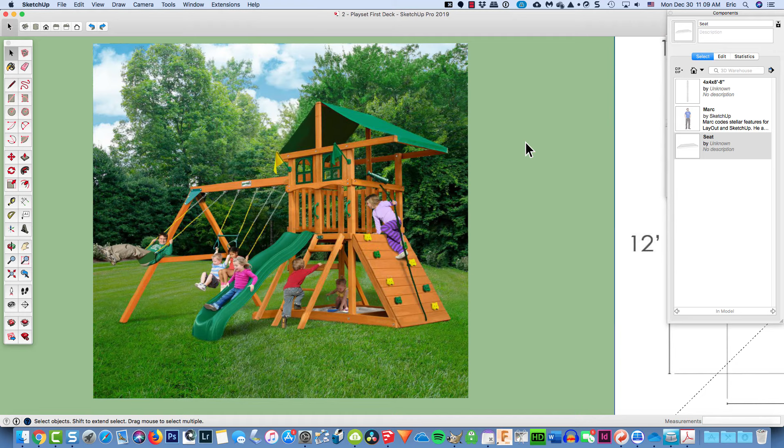Okay, next we're going to come in and build this first deck right along here. You'll note that it's basically just a platform. These boards right here are probably 2x4s.

T for tape measure tool. Let's do that one more time and move that up so it's a little easier to see. So now I'll just measure there, and yeah, it's about 3.5 inches. So those are 2x4s, and again, we're just going to make them 2 inches by 4 inches.

So I'll go Shift Z for zoom extents, and I'll come into my 3D view. I'm going to go ahead and erase this guideline that we made for making the seats. We don't need that anymore.

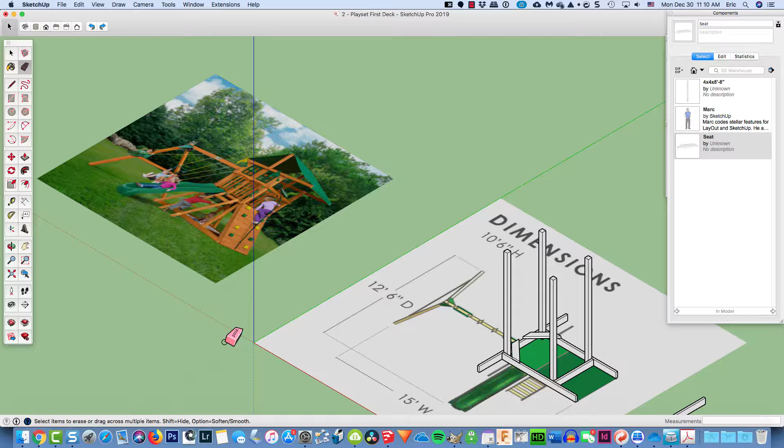I'm just going to take this right here. I'm going to select it, right click, make it a component, and call that piece a 2x6. And it puts it over here so I can bring another one back at any time if I want, but the reason I did that was just so I can delete it for now. Because next I'm going to make 2x4s.

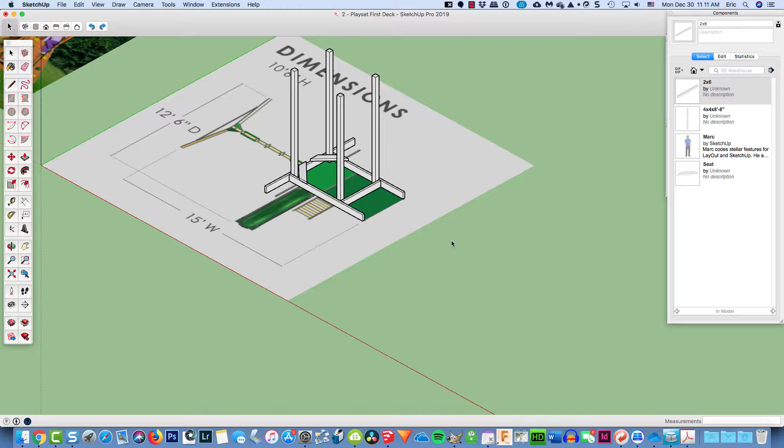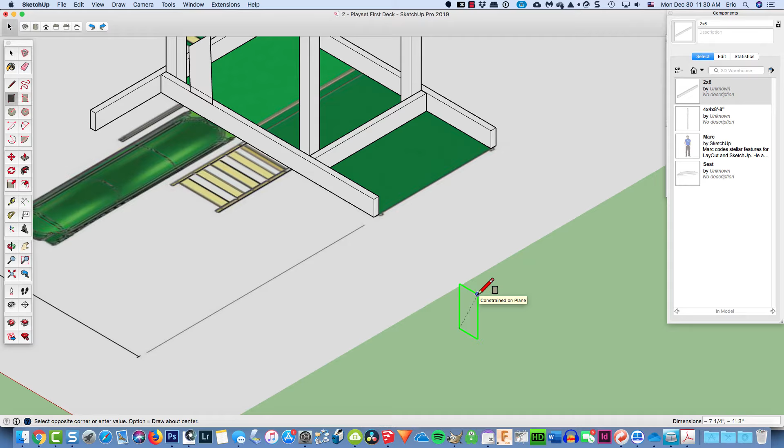I'm going to make them the same way. So to make my first 2x4, I'm just going to make it the same way I made my 2x6. I'm going to start with a rectangle, place it out here on the ground, use my arrow keys to line it in the direction I want, then type in 2,4 since we're working in inches, and then P for the push-pull tool.

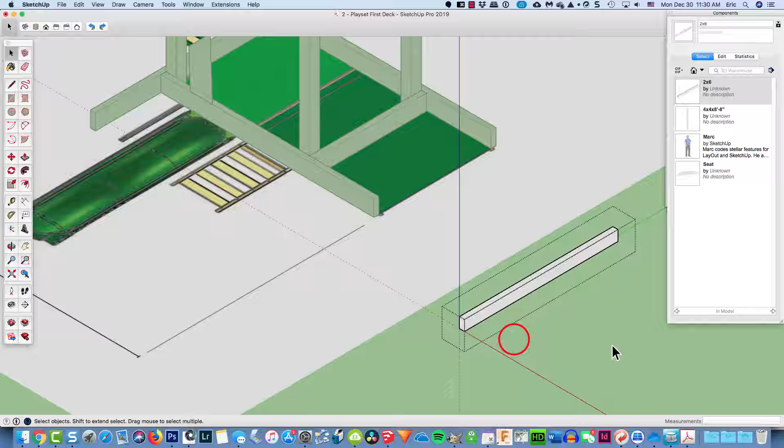Now I'm going to triple click on this and make it a group so that whenever I click on it, it selects the whole thing. However, if I want to change the length of it, I'll need to open up the group by right-clicking and editing the group, or double-clicking on it. Both do the same thing. Then I can make it longer or wider, and eventually I'll probably make this into a component as well, but for now I'm just going to leave it as a group.

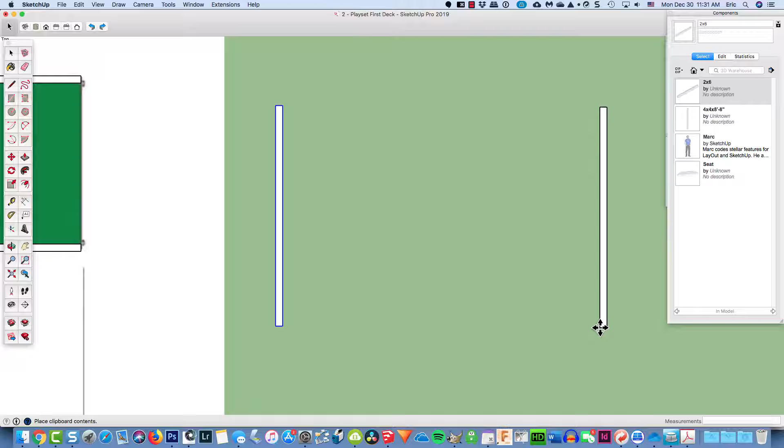So I'm going to come into my top view here and shift over a little bit, click on this, Control C for copy, paste. I'm going to put another one right there, then type Q for rotate, click on any corner, come out, pull down 90 degrees. So now everything is oriented with the posts on my playhouse.

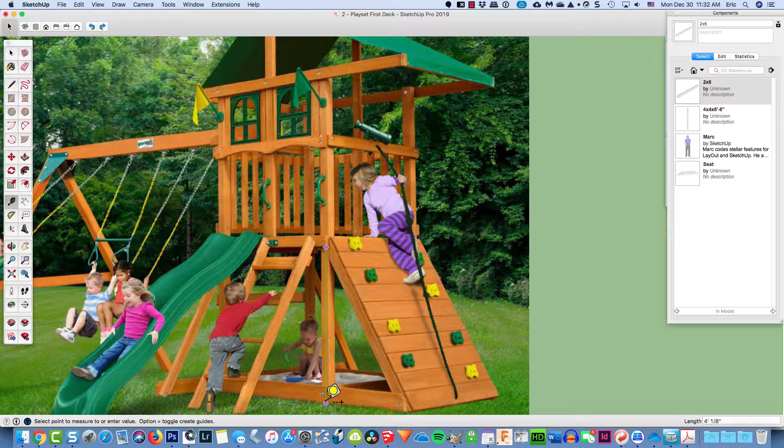So let's come back into this view and take a look at our picture. Let's find out using our tape measure tool how far it is from the bottom of that 2x4 down to the ground. It looks like it's about 4 feet, and 4 feet's certainly close enough. So I'll do a zoom extents, and then come into this view here.

What I want to do is make a line that goes up 4 feet. So where's a good point to do that? Well, I'll do it on this outer face here. What's really going to help me out is if I can go to X-ray mode, and you'll see why.

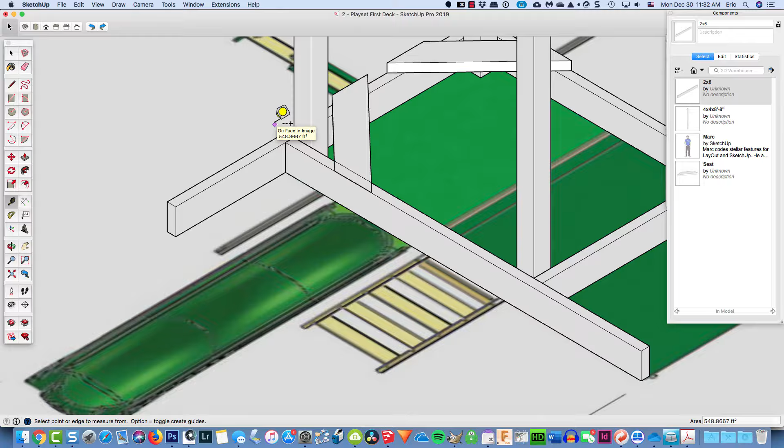So there's X-ray mode right there. I can pick that point right there and drag up along the blue axis, type in 48. Oh, I accidentally right clicked there. There we go, type in 48, hit enter, and I've now got a guideline that goes across my post. I'm really only going to need one of those, although you could certainly go all the way around.

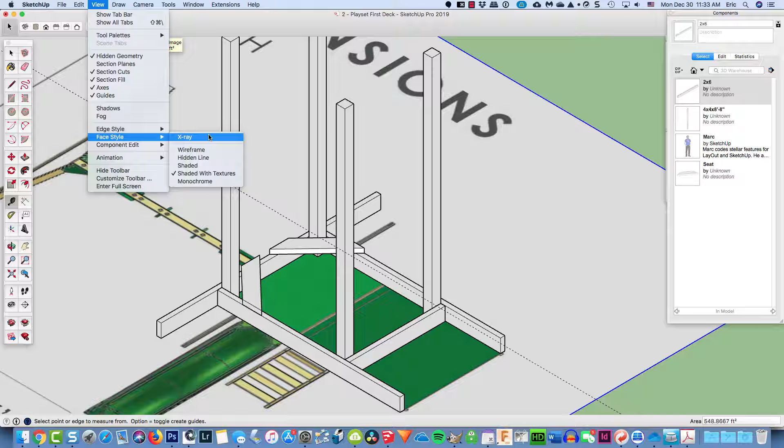Now, how did I do that X-ray mode? Well, I just pressed my X key because I use it so many times. But you can come up under camera—I think it's under camera. Nope, it's under view, edge style. Nope, face style, there we go. X-ray. So it's been a while since I've looked for it. You can click on that and it'll turn on X-ray for you.

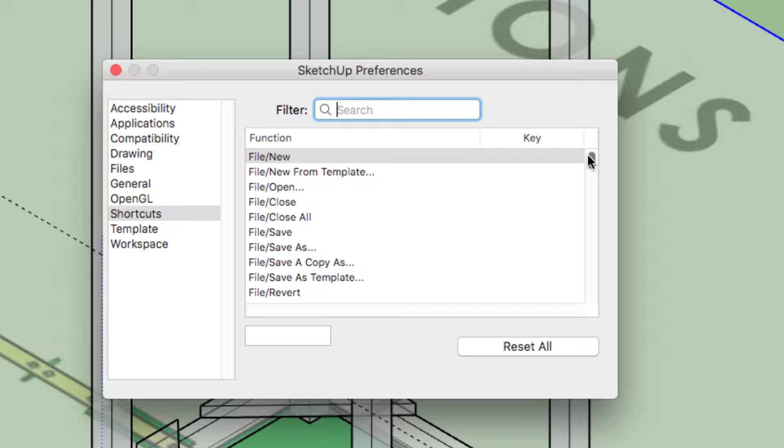But that's a little bit of a pain. So what I do is I come up into my preferences and go into shortcuts and look for—there's a billion different shortcuts you can pick here. Okay, so I want to filter those out. I'm going to type in X dash, and there it is right there. So what I did was I highlighted it and then typed an X in right down here. That's why it shows up here. You won't have anything there, but just put an X right there.

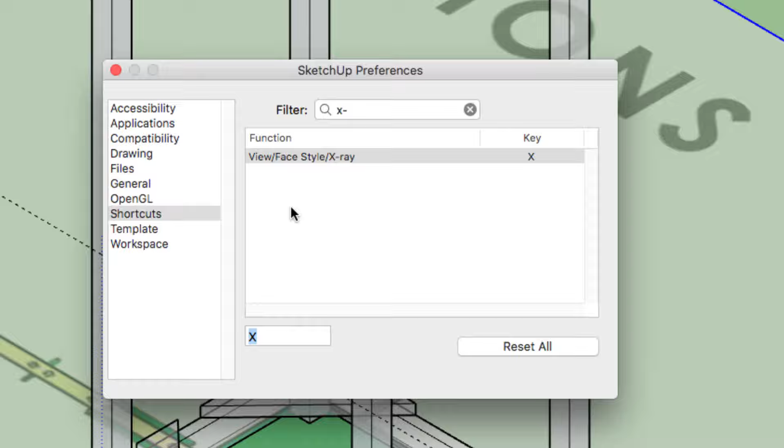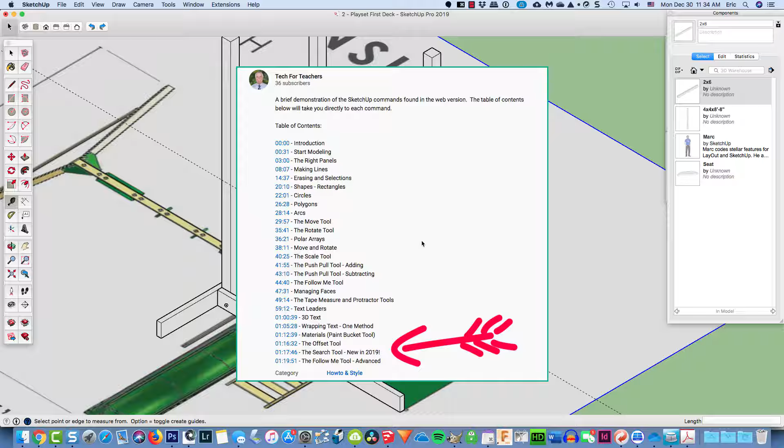After you've done that, you can close these preferences and turn X-ray mode on and off by just pressing your X key. Super, super handy. Now, if you're using the web version, go back and take a look at my screencast, and you'll see a link that'll show you how to do that. But basically, you use the search tool, which is pretty cool. You don't have these menus across the top in the web-based version.

Okay, so let's go ahead and get started with the deck. I'll use my select tool here. I'm going to grab this 2x6 and copy it. I'm going to paste it, and when I do that, it goes ahead and attaches it.

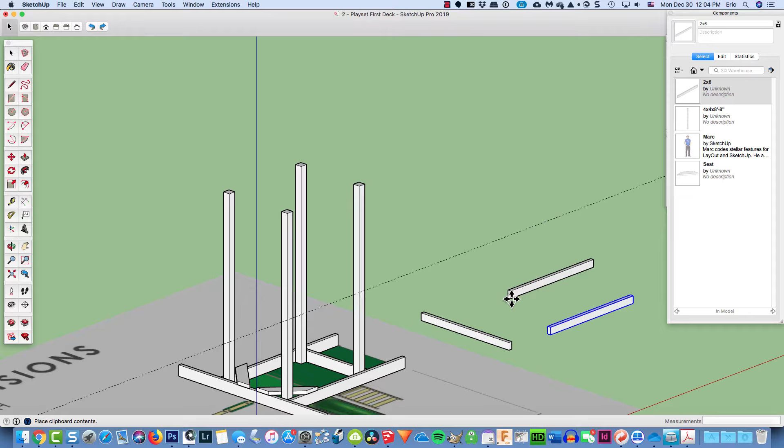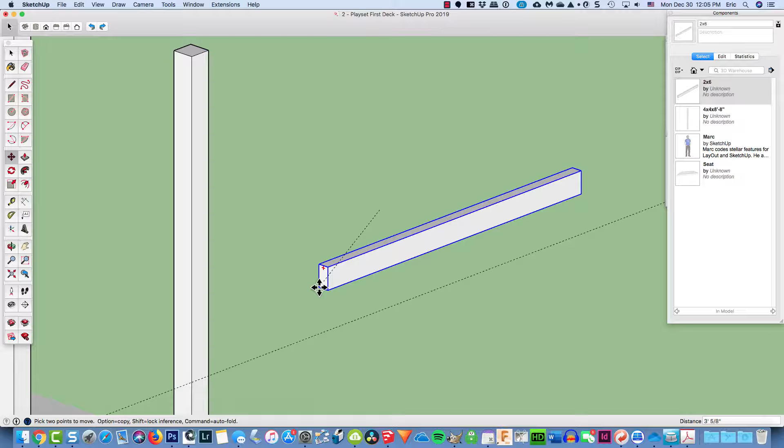We'll zoom in here to see how it attaches to the origin, or the point where I started to create the 2x6. Let's go ahead - we don't want to place it inside. So what I'm going to do is type M for move and grab that point instead, even though SketchUp was trying to do me a favor here. I'm going to put it right there, and then orbit around this side because it's just a little bit too long.

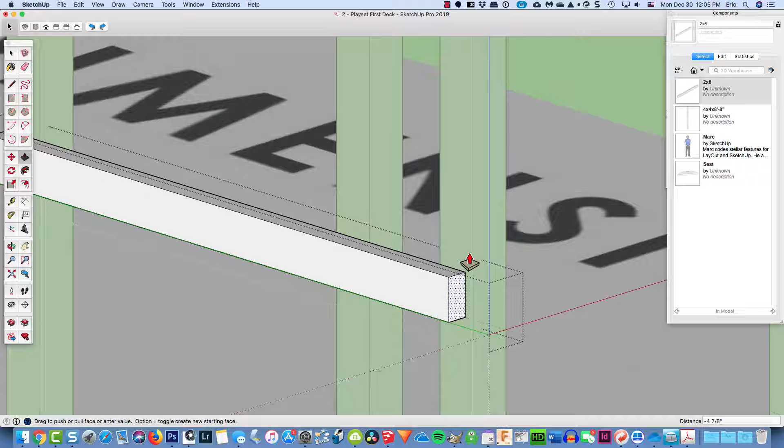I'm going to double click on it to open up the group. P for push pull, and I'm going to pull it in. I could guess how much, but what I really want to do is just line up the face of the 4x4 and the end of the 2x4. Then I can just click, and that is done.

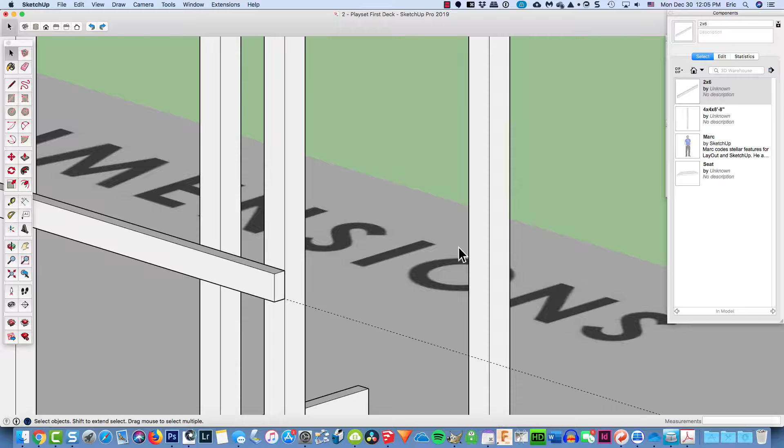Now, to make that work even easier, I'm going to go ahead and move it across along, I think, the red axis. So I'm going to click this right here, type M for move. I'm going to pick this base point right here - oh, nope, I don't want to pick that one, I want to pick this one. And I'm going to start to move it along the green axis.

Before I left click to place it, I'm going to tap the Option key or the Alt key, and then I'm just going to move it across to here, parallel to the green axis, and on this edge. I now have a copy that is all lined up just like it should be.

Okay, this next part, I'm not exactly sure how the Gorilla folks put it together, but we need to make a floor and we need to have some supports for it.

So what I'm going to do is select this 2x4 and I am going to move it. I'll type M for move, and I'm just going to go ahead and click anywhere, and I'm going to pull it across, tap my Option or Control key. I want to make sure I'm along the green axis so everything is looking good. And that's a distance of 6 inches, because if you include the 2 inches for the 2x4 and the 4 inches for the 4x4. So I'll just type in 6 and hit enter.

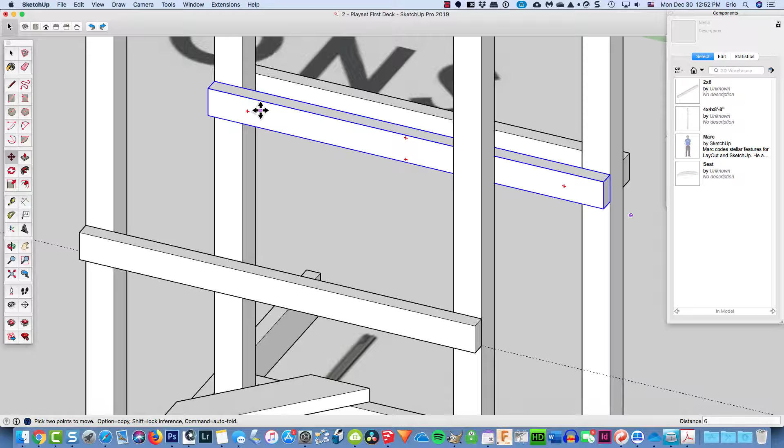And then I need to move this down 1.5 inches. So I'll just click anywhere while on the move command, pull it down along the blue axis 1.5, hit enter.

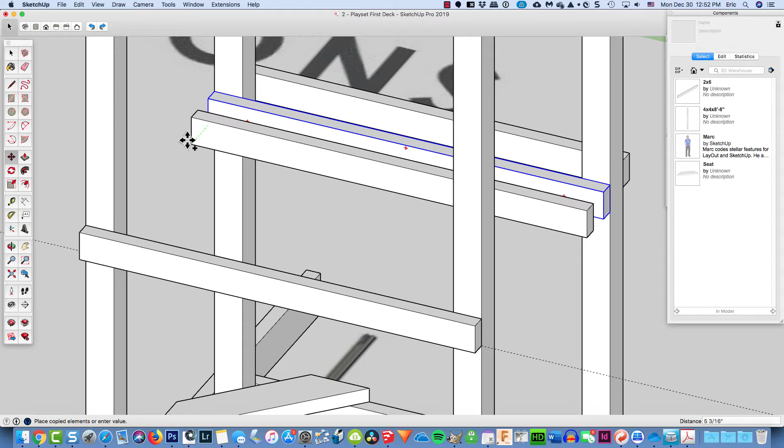And then I'm going to make a copy move. So I'm going to grab this base point right here, move along the green axis, tap the Option or Alt key, come across here, and this is a good time to open up X-ray so that I can attach it parallel to the green axis to that back edge. There it is right there.

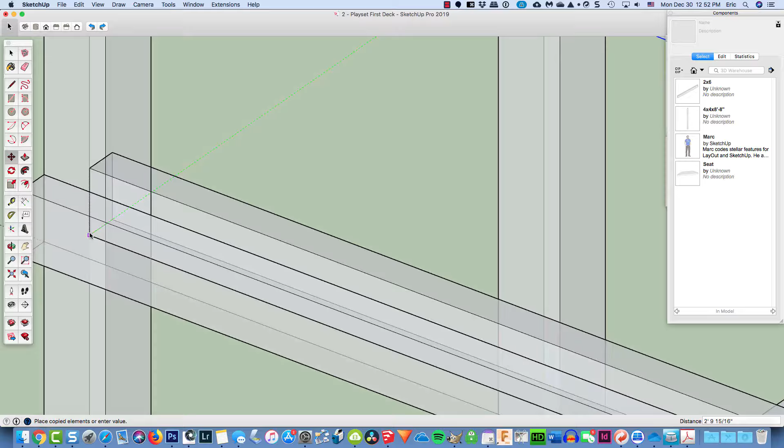So it's on the edge of my 4x4, so I'll click on that. Let's see if I did that right. Turn off X-ray, and it looks pretty good. Let's go to some of our orthographic views here so that you can see what we've got. It's across here that I'm going to build the deck, so let's go ahead and do that next.

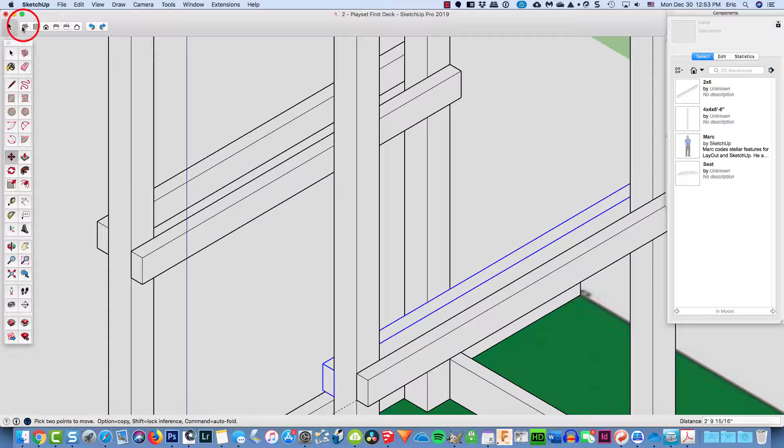I'm going to do something a little bit different here. I'm going to right click and I'm just going to hide the image and turn off my hidden geometry so that I've just got my building materials now. If I want to get it back, I can come up under View, select Hidden Geometry, and now it shows up as a grid. Right click and unhide it, brings it back.

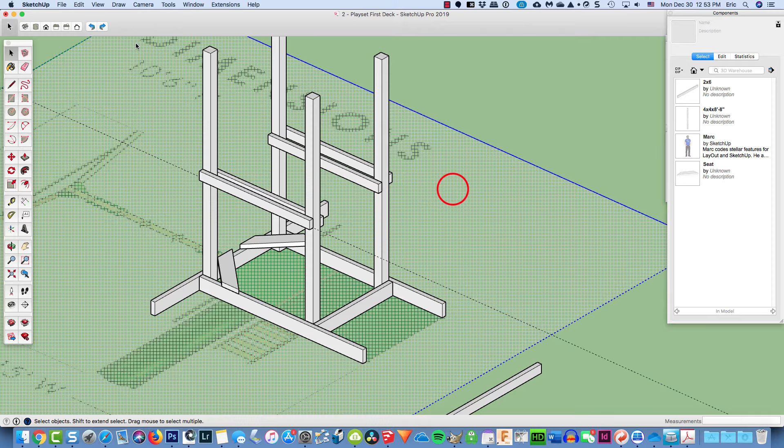Okay, so let's go ahead and grab one of these 2x4s that are going in this direction, and I'm going to do a move and I'm just going to pull it up, just make a copy. Again, you can copy and paste. Q for rotate, and I'll come to the end here, rotate it 90 degrees so it's laying flat.

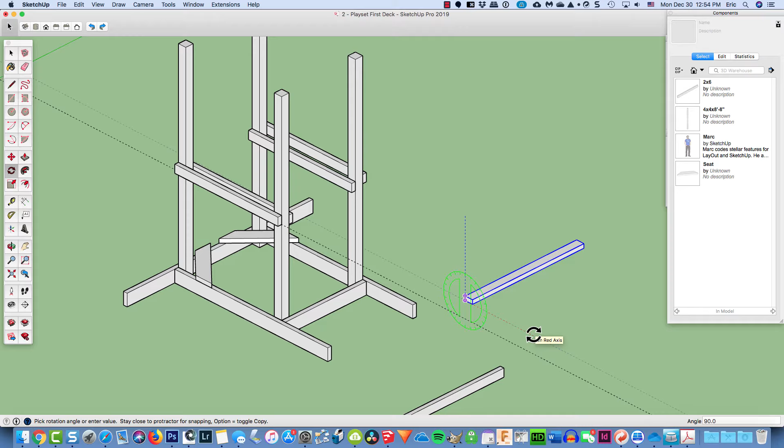Type M for move, grab that top part right there, Option or Alt to make a copy, and then I'm going to put it right there.

Now, I moved it down 1.5 inches, didn't I? Because I was thinking that 2x4s are really 1.5 inches, and that's true, they are. But we've been doing everything in 2 and 4 and 6-inch units. So that's why they overlap in that area.

So let's just quickly fix that. Click on this one, and hold down my Shift key and click on this one. M for move, click anywhere, move down along the blue axis, 0.5 or half an inch. And there we go, that's fixed.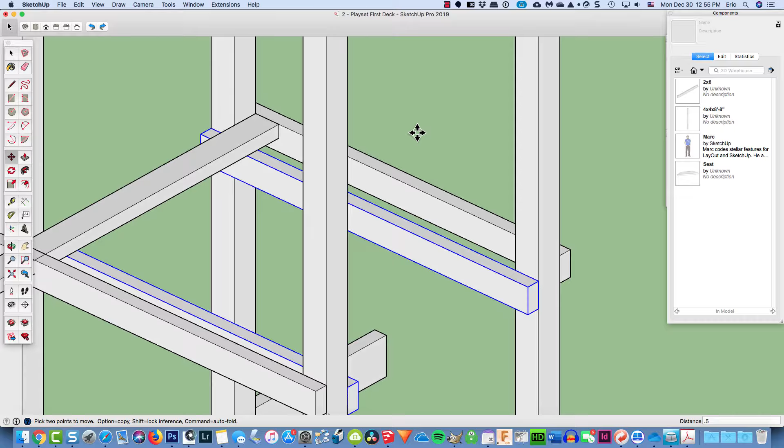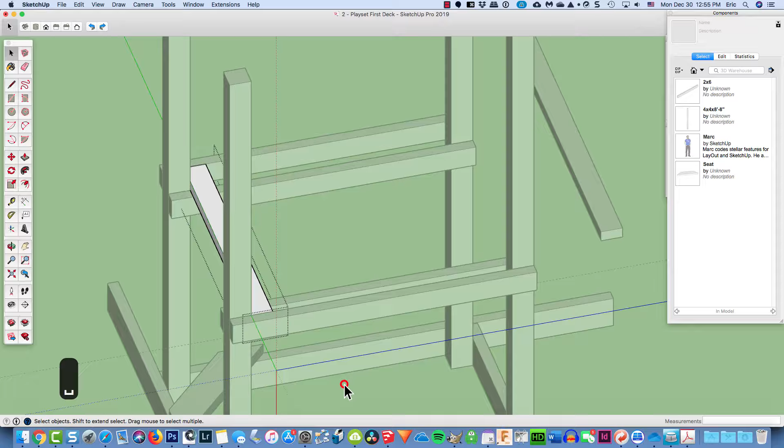So let's see here now. This part is pretty amazing, but before I do it, I need to shorten this up. I'll double click on that group, P for push pull, and pull it in so that it's even with that edge. Then click outside, and it now fills that space.

So what I'm going to do next is fill all of this in with just a couple of keystrokes. You're going to need to listen carefully because everybody wants to click down here in the measurement toolbox. You never ever click in here. You just go ahead and type and it starts putting numbers. That's something people need to adjust to with SketchUp.

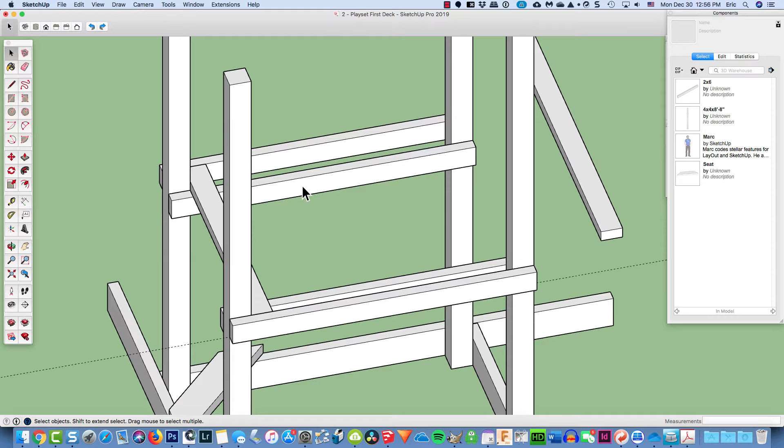So let's go ahead and make those copies. I select this, M for move, grab this top point, and as I start to move it along the red axis, again tap the Option key and plunk it right there.

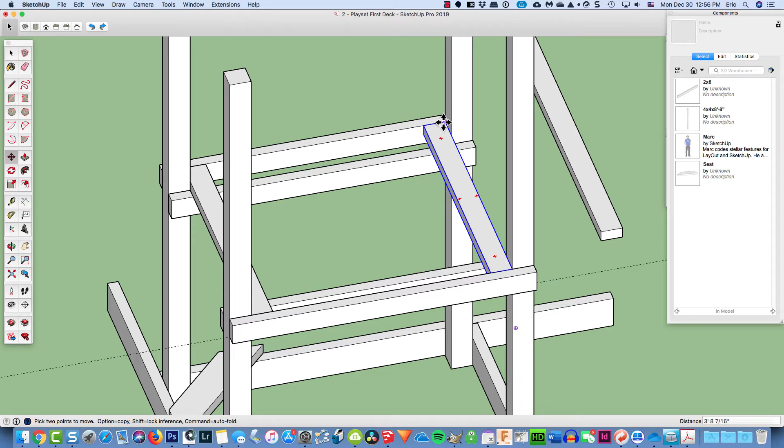Now here's where the magic happens. I did left click to place that right copy, but now I'm going to fill it with boards. I'm going to just guess that maybe 8 boards will fit there, so I'll type in 8, then the slash or divided by key, and hit enter, and it evenly spaces 8 copies.

Now 8 would work, but 9 might be better. Again, I haven't touched the mouse - my hand is off the mouse, I can't stress that enough. Go 9 divided by, that looks better. Let's try 10 divided by, that's better. Let's try 11 divided by, and it looks a little too tight, so I'm just going to stay with 10 divided by, and go with that.

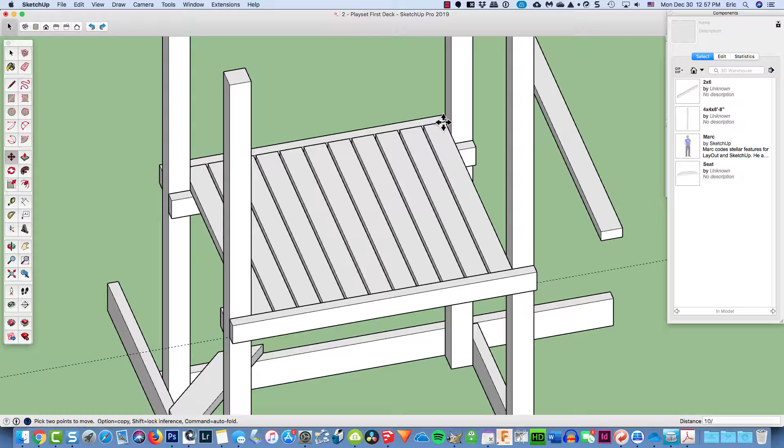So now I need to fill these ends right here. I'm going to go ahead and grab this, M for move, grab this top corner. Actually, I'm going to turn on X-ray and just grab that top corner there, and then turn X-ray back off. I'm going to start to move it out because I want to put it about right there.

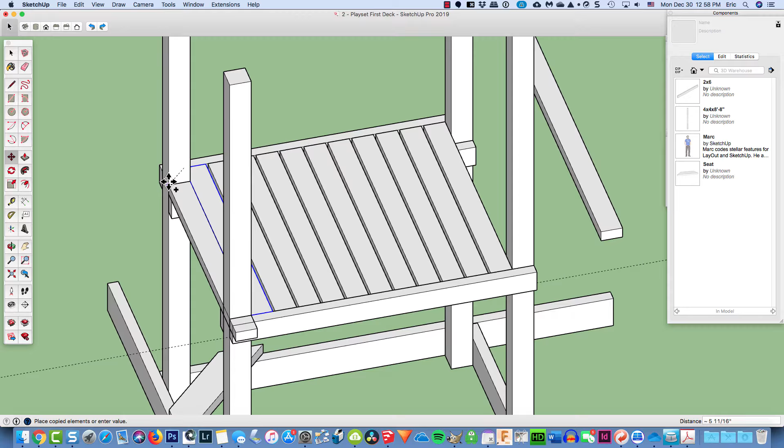But if I don't tap the Option key, I won't get a copy. Does that look about right? Yeah, that looks right, so I'll place it there.

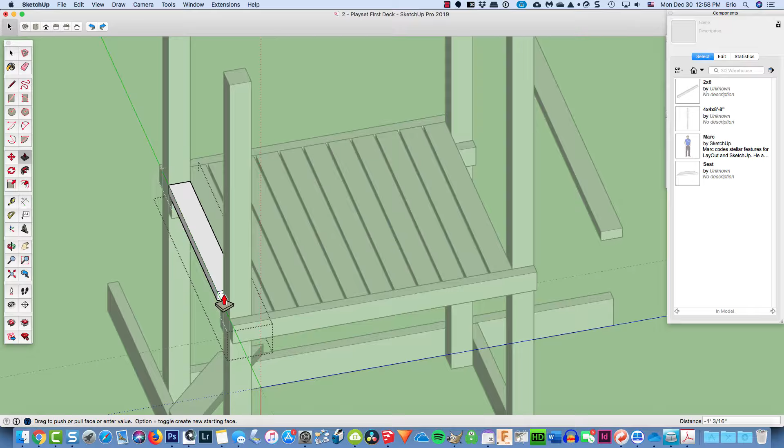Then space bar, open up that group, P for push pull, and pull it back so that it's about there. Then let's rotate this around. And then I'll pull this so that it's even - let's see, I need to grab it right on the edge here.

There we go - wrong surface. There we go, just pull it out so that it's even to about there. There we go, and I like that.

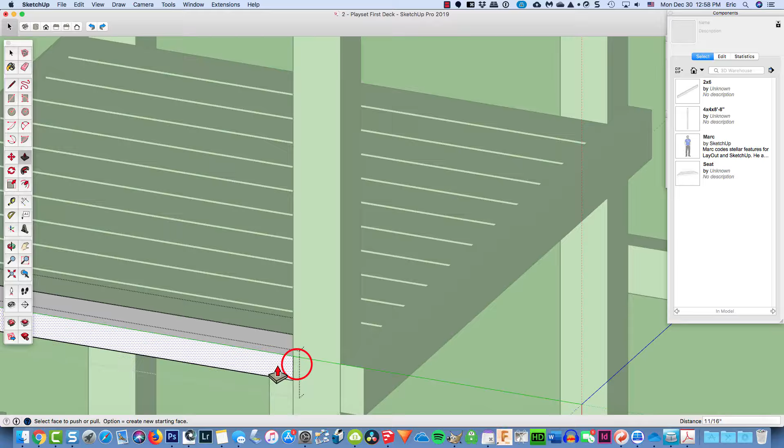So I'll click outside the group and then take this - probably know where I'm going. M for move, grab it right there on that end point, start to pull it across, make a copy, plunk it right there. Let's look at our top view, see what that looks like. It looks pretty good.

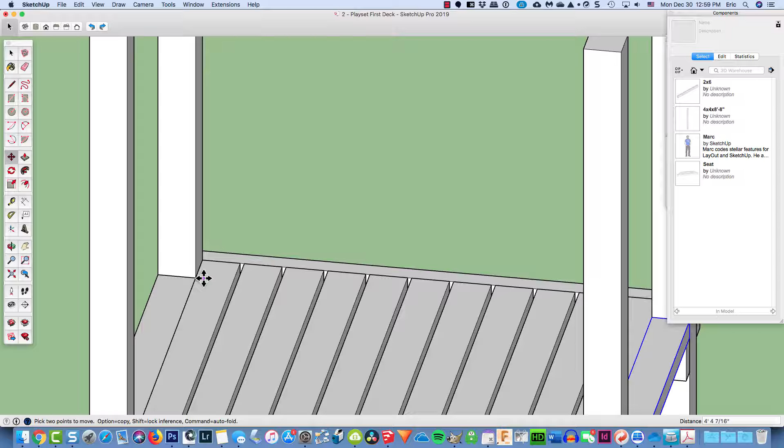I'm not real happy with the spacing right there, but I'm just going to go ahead and call that good because that fills everything in. I think if I was to redo it, I would take and scoot that over just a touch. As a matter of fact, I'm just going to redo it because it bothers me.

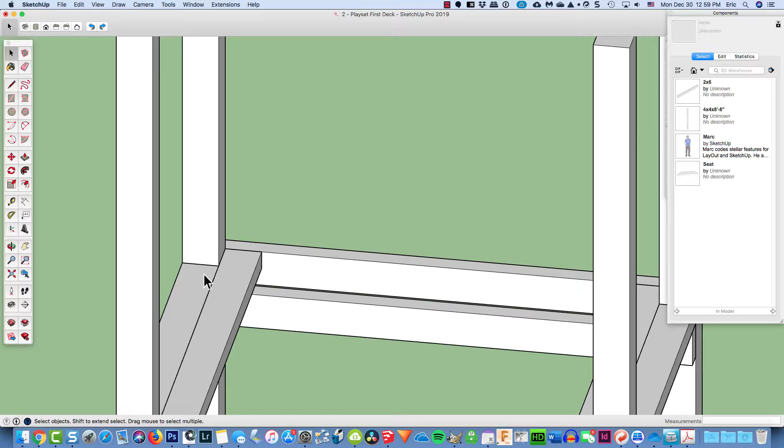So I'm going to hold down my shift key, because this isn't going to take very long to do it all. I am going to just delete those boards, and then use the move tool and grab it and just move it along the red axis, and I'm going to type in 1/4 for a quarter of an inch, and that gives me a little bit of a gap.

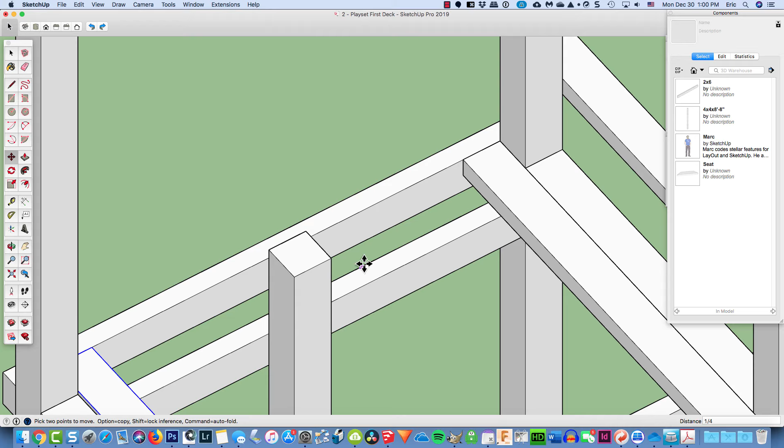And so now I'll rotate this around. Oh, I forgot to delete that board right there. Let's use our tape measure tool to make a guideline here, and I'll type in 1/4 inch. So I've now got a place to move it to.

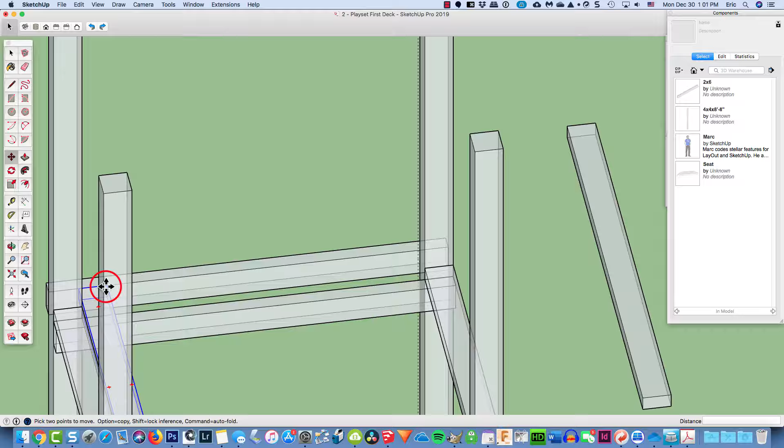Click on this, M for move, turn on X-ray, grab that corner right there, move it along here, Option key until I get to that intersection, turn X-ray off.

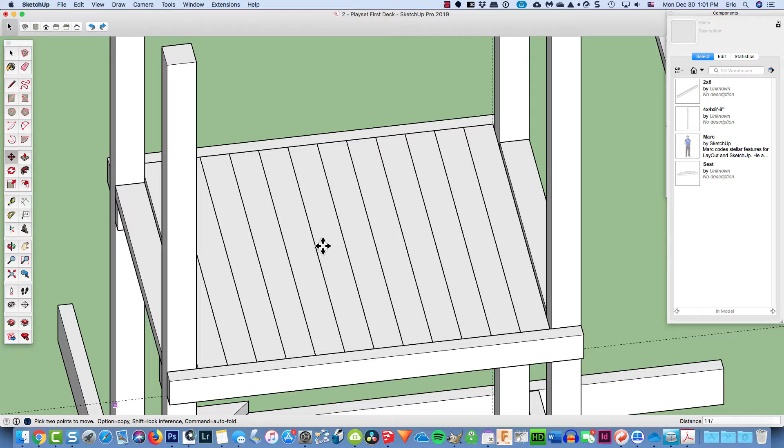Let's try 10 divided by, see how that looks. Let's try 11 divided by - a little too tight, so we'll stick again with 10 divided by. That quarter inch didn't really seem to matter a whole bunch, but I like that spacing a whole lot better. So at this point I'm going to save, and we will work on the railing next.

When we look at the railing here, what we've got is boards that go across the top, and that one's going across the back, and I'm just going to make all those 2x6s. We've got these rounded notches here, which we'll address separately, and then we've got some 2x6s that go across the back sides, and then these vertical slats.

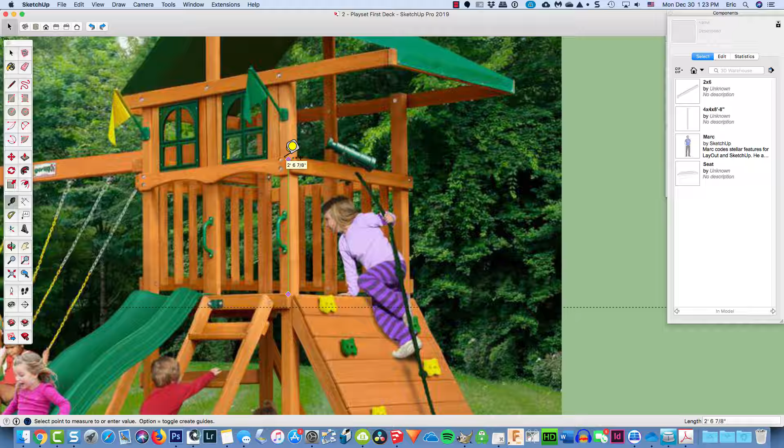Let's do a quick measurement, T for tape measure. I'll go from the first deck platform up to about there, that's about 2.5 feet, we'll call it 30 inches. I'm going to use my tape measure tool to put it on this line, bring a guide up along the face of that post, then type in 30 inches, and it'll snap it in place for me.

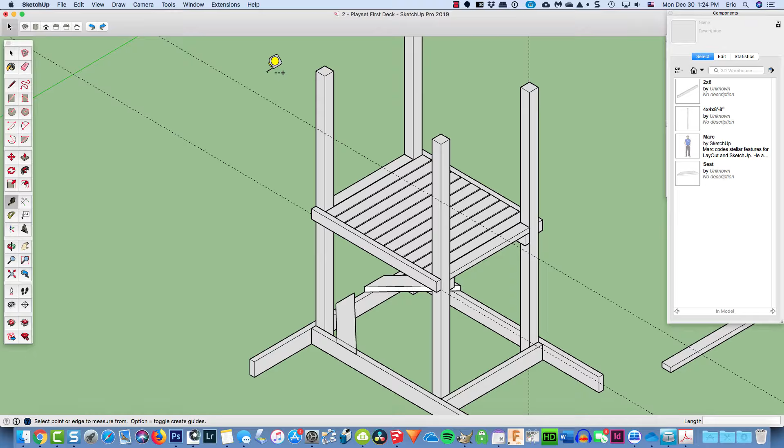At this point I've already created a 2x6, so I'm just going to grab it out of my components and put it right there. Then we'll do the same thing, M for move, grab this point, pull it along the red axis, tap my Option key, and put it in at that intersection.

I've got to put one across the face, so I'm just going to move one out here, do a copy paste essentially, Q for rotate. If you're having trouble getting your protractor to snap, remember you can use the arrow keys to move it around in the different orthographic positions.

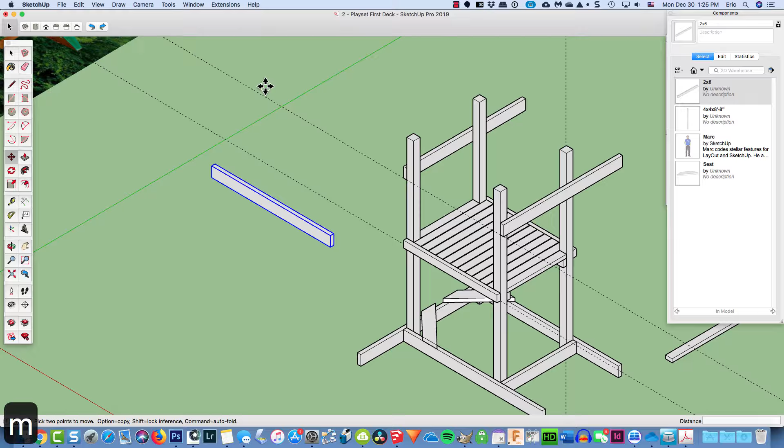This time I just want it to be there, so I'll come out along one of my axes, snap to the second one, and now I can do a move. So I'll grab this one here and put it right there, then M for move, click there, pull across to here.

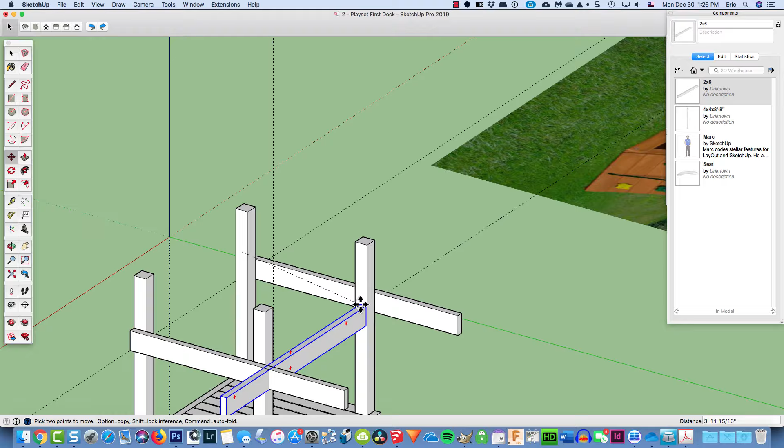Let's orbit around here so we can see our point. Got to tap my Option key - I make it sound routine, but lots of times I forget to do it, so I have to go back and start my move again. So now we've got the top of the railing constructed.

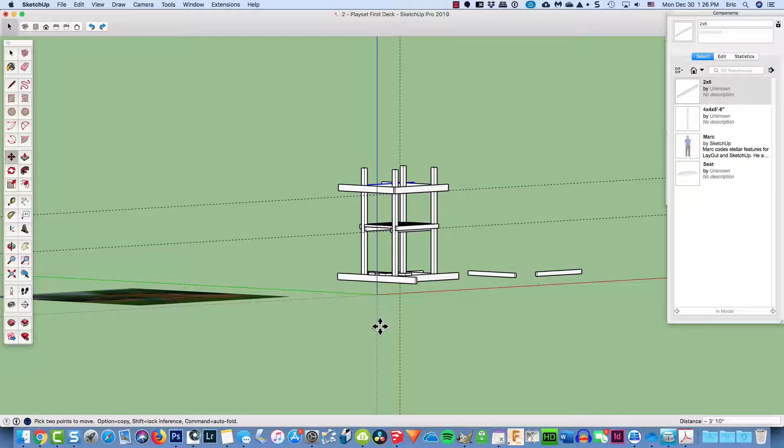Let's come around to the back side here. I'm going to take this one and move it down - we don't really have a measurement for that, so I'm just going to click out here, pull it down along the blue axis, and put it about there.

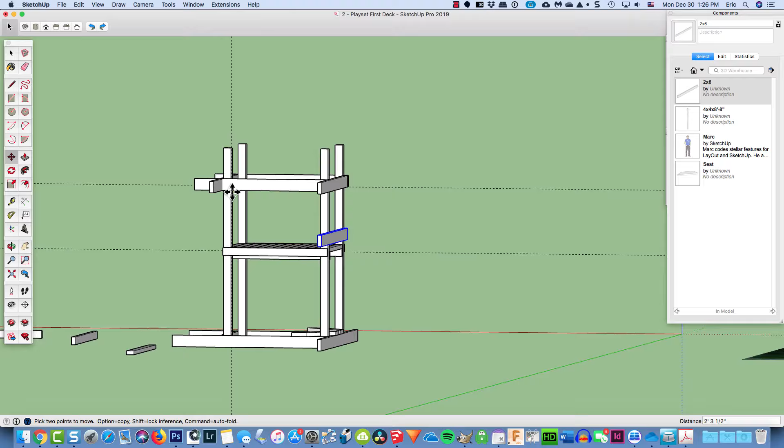Let's go ahead and select this one, move it, Option or Alt key, and line it up with - there we go. Bring it down on the blue axis, it goes ahead and attaches it to the face of the post.

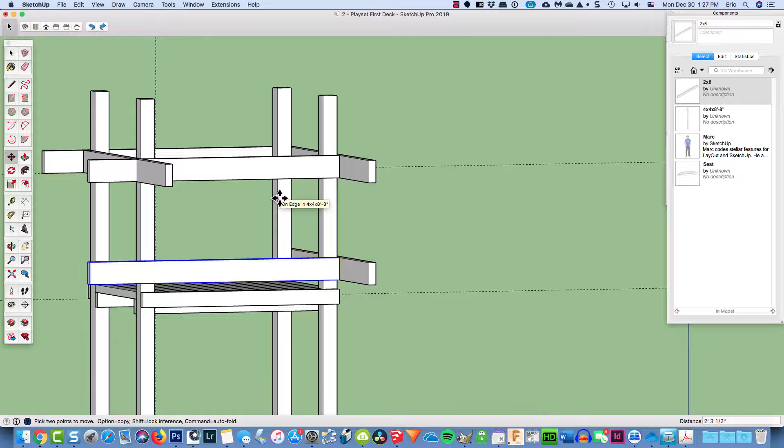Now I need to change the lengths of these. So to do that, if I go ahead and edit this component, use the push-pull tool to pull it in - see how they all change? That could work, so it saves me a little bit of time.

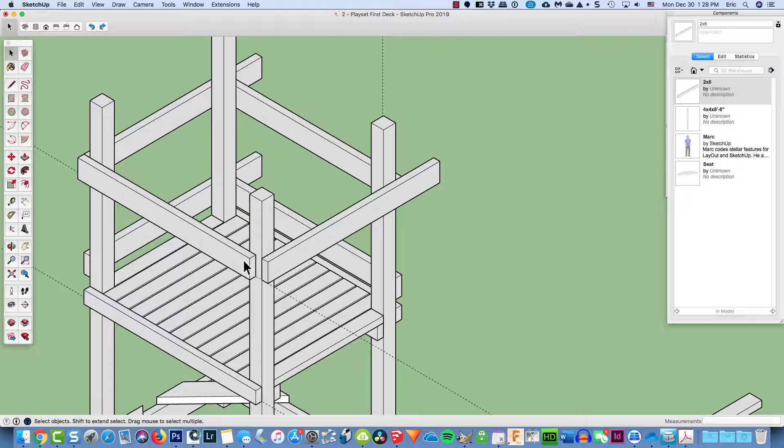But to bring the rest of these out quickly, I'm going to make this one unique. Then I'll double click on it, P for push pull, pull it out so it's even with that face, spacebar, click outside. Let's go around here.

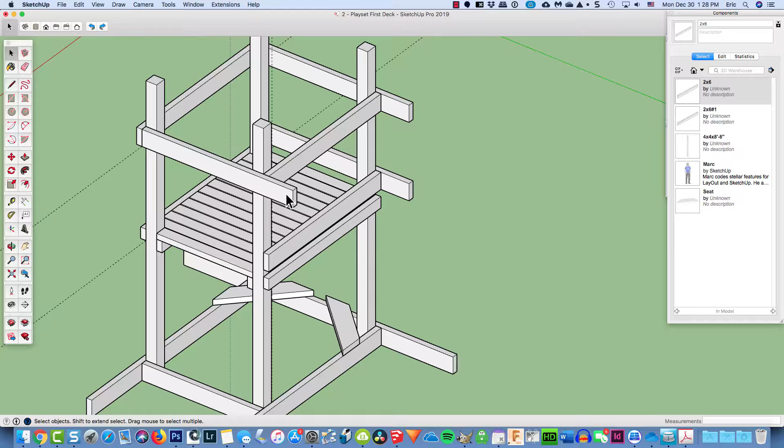We'll do the same thing. I'm going to make this one unique, then double click on it, P for push pull, and pull it in so that it's - we'll just make it even there. I don't think it's going to make any difference whether it's even with the top or the bottom.

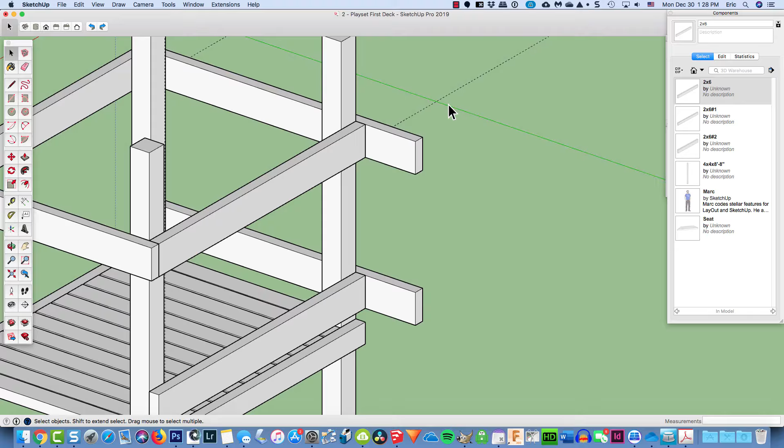I'll pull this one around, and again make it unique, double click, and pull it in, and I think that'll work. Again I'll select it, make it unique, P for push pull - oops, got to open up the component or the group - P for push pull, and pull it in like so.

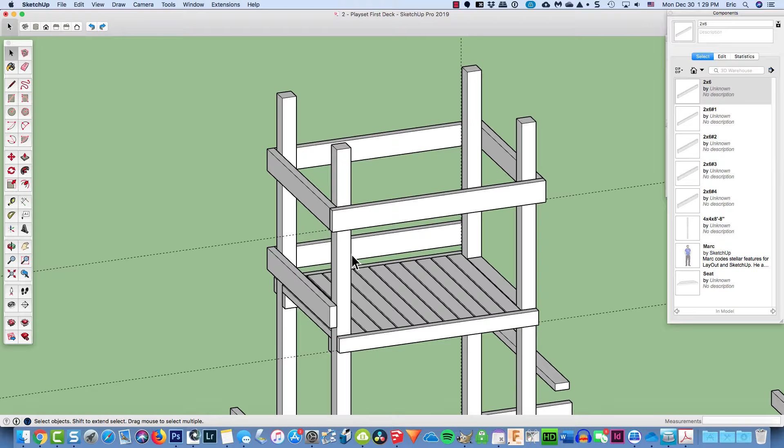So we've got the back opening now, and what we need to do is put in those vertical boards. I'm just going to go ahead and eyeball this because I think that will work. So I'm going to click on my rectangle tool and click here and come up along this face. Let's make it about that size. P for push pull, let's pull it out 1 inch.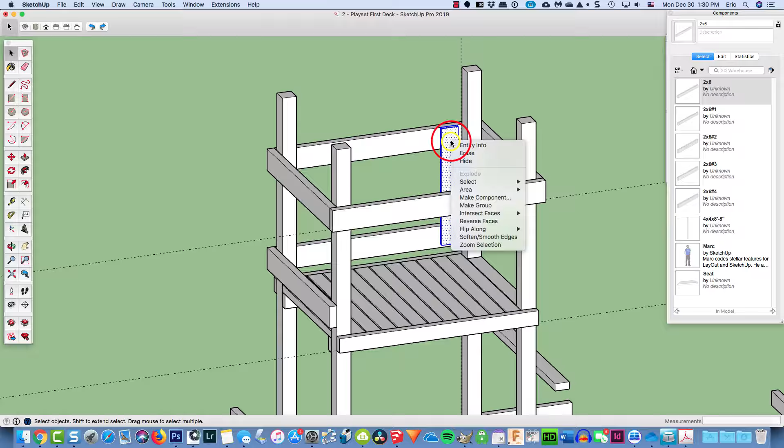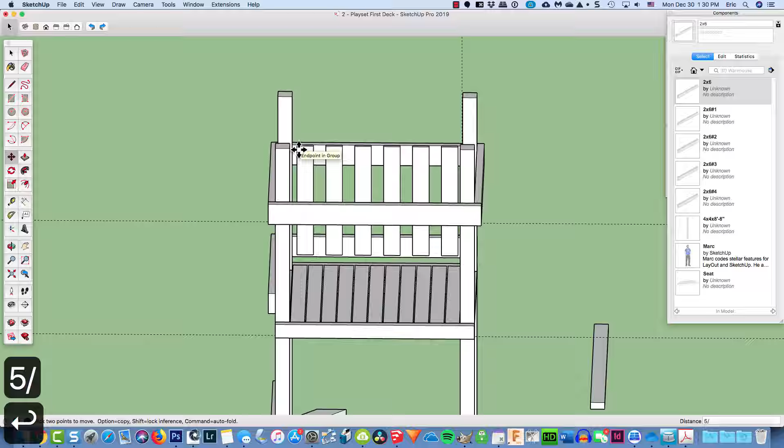And then let's click on that, let's make it a group. We'll come around this side, go M for move, make our copy, we'll just eyeball it. And then without touching the mouse, let's go 5 divided by - that looks pretty good.

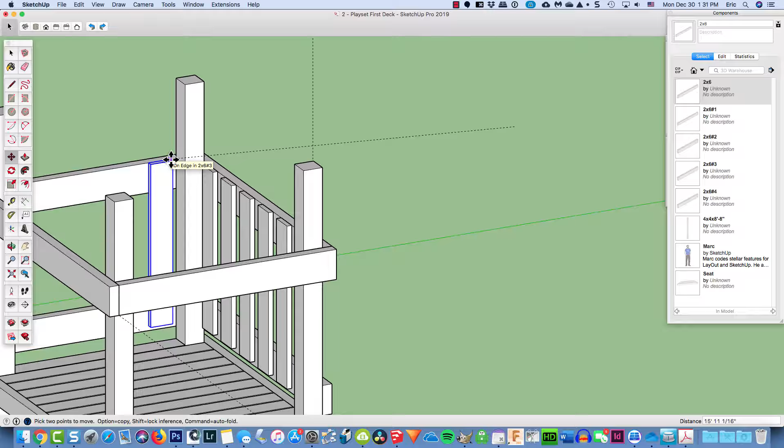Let's see, I'm going to grab one of these boards, copy it, paste it, pull it out here, Q for rotate - there we go, rotate it 90 degrees. And then I'm going to move it from that back corner so that it's on that edge, so it's about right there.

Let's push this over, orbit it around a little bit so we can see what we're doing. M for move, but I'll just go ahead and grab it on the face, pull it across, do what I usually do.

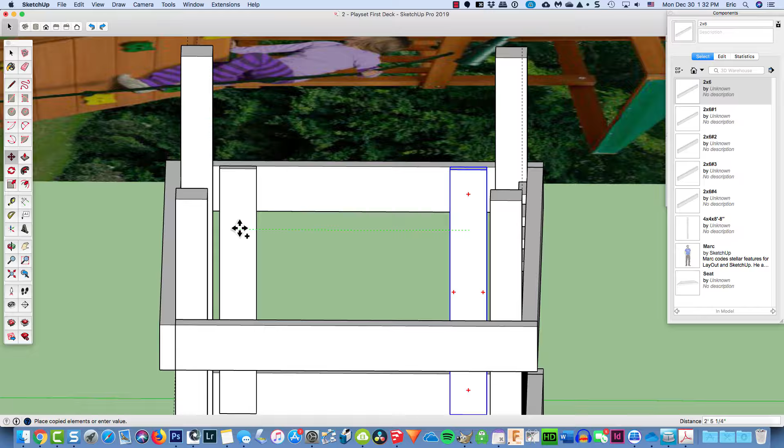We need to zoom in because it's kind of snapping. We eyeball it, and let's try 4 divided by this time. Let's compare it with the other one. And that looks pretty good. Matter of fact, that looks really good. So I'm going to go ahead and save it.

Next I'm going to put in those 2 notches in that 2x6. Okay, I was taking a look at this and thinking there's not much room left on this post. Then it occurred to me that we took that measurement from the deck up to here and made that guideline at 30 inches, and that was supposed to be at the top. So this 2x6, along with all the other railings and pieces, needs to be lowered down. Now I don't want to redraw all that, and if you made the same mistake, you don't want to either. Here's how we're going to fix it in just a couple of mouse clicks.

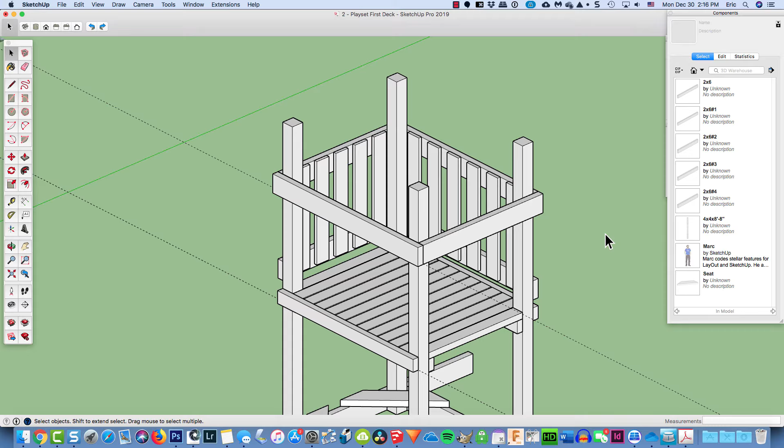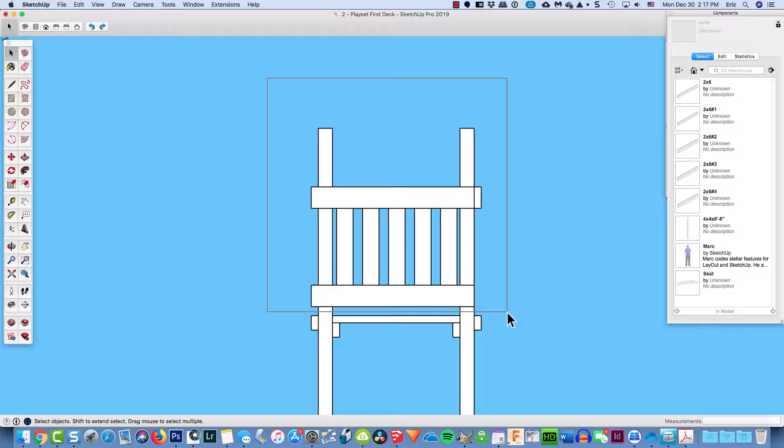We'll take a look at a primary view here, and I am going to select all of the boards and railings, but I don't want to select the posts, and you'll see why in a moment. If I draw a selection box from right to left, it grabs anything that's touched inside that box, including the posts. So I'll click outside here to deselect, and instead I'm going to drag from left to right. Because the posts are not completely enclosed within this box, when I let go, it just grabs all those railing pieces that I made.

While I've got them in place, I'm going to go ahead and make them a group. I don't have to do that for the next step, but I'm just going to go ahead and do that at this time so that other things don't stick to them later on. I can always ungroup them by exploding the group, but I don't want to do that.

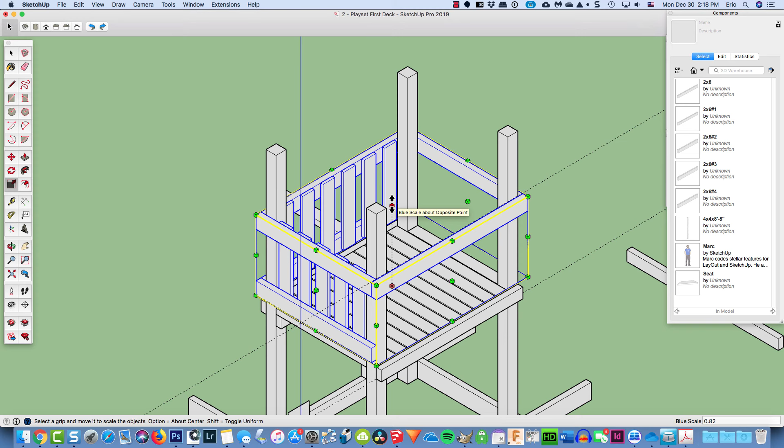So now I'm going to type in S for scale, and these nifty grips show up, and they allow me to just do all kinds of wild scaling any way that I want. Undo it. And the grip that I'm interested in is this one right here in the middle, and I'm just going to go ahead and pull that down. I'm looking at this area right in here. I'm just going to move it down about 6 inches. And so that everything looks good, mission accomplished.

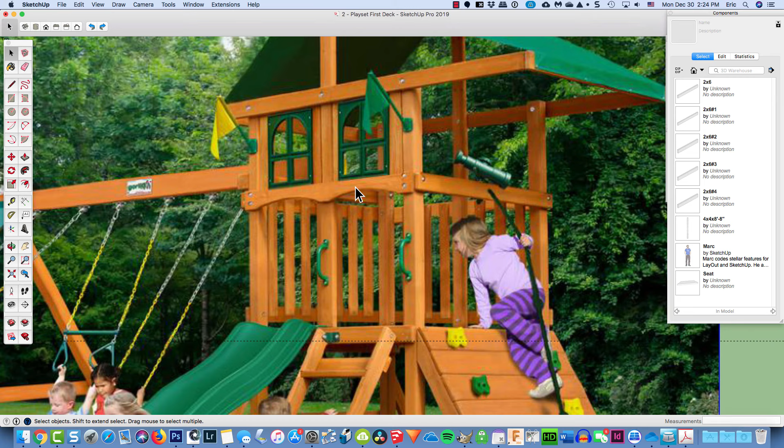Okay, next we need to just cut out this little archway right in this area here. We haven't put in this 2x4 yet, this vertical post, but we need to leave a straight edge right along here, about 4 inches, maybe just a little bit more, and try to center the arc. There's nothing super critical about the dimensions of it. So let's just go ahead and do some layout geometry.

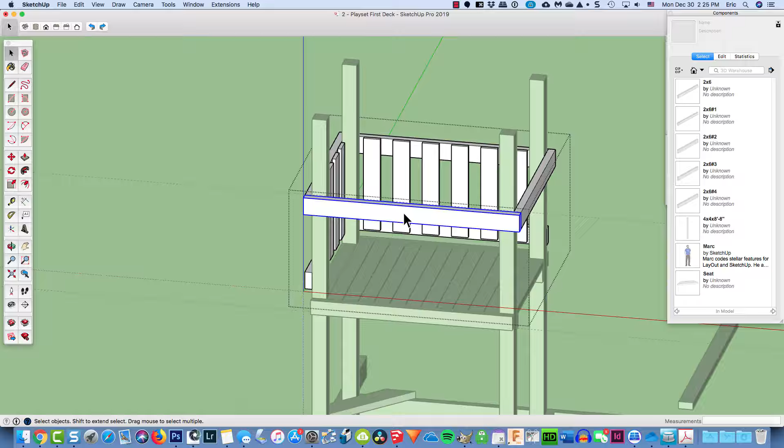The piece we're going to be interested in is this one right here. So let's pull it around about like so. I think that'll work well for us. So I need to now come in and double click to open up this particular board, and double click to open up the group. Using the tape measure tool, I'm going to just pull a line off of here until I get to the midpoint right there. And then we'll zoom in here just a little bit.

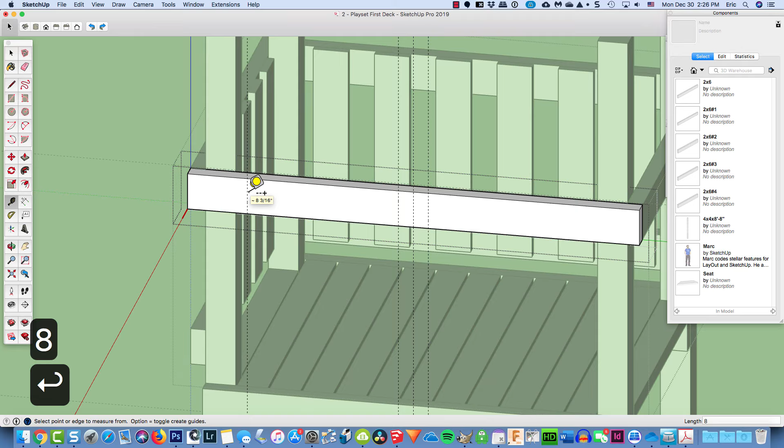I'm going to pull this way 2 inches, so I'll type in 2 and hit enter. Just grab this guide, pull it across again 2 inches. And let's just pull one from this end. That's probably lined up with the edge of that vertical post, so I'll pull in here and type in 8 inches. Then same thing from here, pull in here, type in 8, and we now have our geometry laid out.

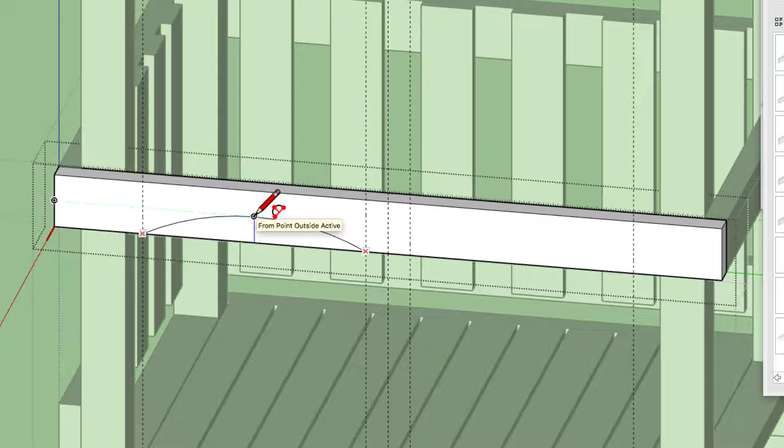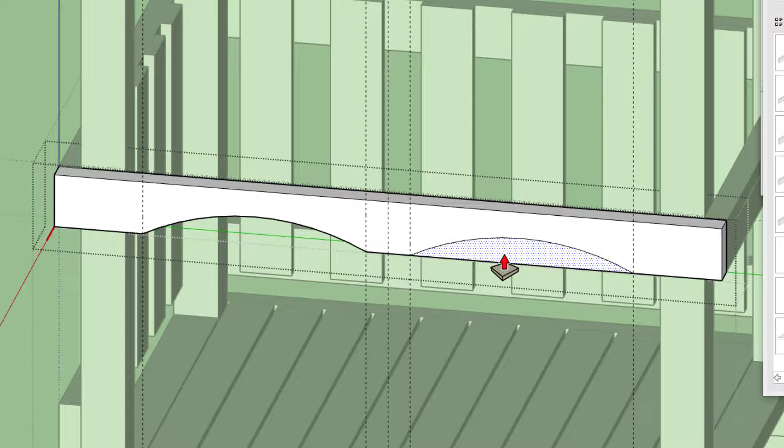So let's go ahead and put in an arc, and I'm going to use the 2-point arc, keyboard shortcut letter A, and I'll click here and here, and then pull up. Oh, it's snapping to this midpoint over here. Yeah, that's a good thing, because that'll make it easy to do the other side. So now I'll click here and here, and then carefully pull up until it snaps to this midpoint over here. With that in place, P for push pull, and I'll push in until it changes color or gets inference, and it cuts it, and then I can just double click on this one, click outside, and mission's accomplished.

By the way, I can go ahead and erase these guides, or under view, I can just turn them off for the time being. Of course, that means if I make new guides, I'm not going to be able to see them unless I turn the guides back on.